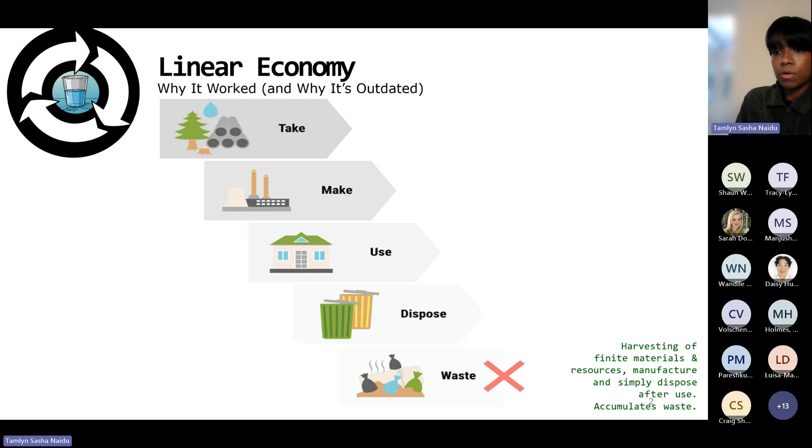The circular economy, on the other hand, challenges this linear model by trying to turn waste into a valuable resource. Interestingly, in the work that I'll show today, I found that these companies - the ones often seen as polluters, the villains of environmental narratives - are actually some of the biggest drivers of circularity.

So to start off, we will look at case study 1, and this is the slaughterhouse. This is the first site that I ever worked at, and it was a massive awakening regarding what wastewater and treating wastewater actually entails. The waste from an abattoir is, in my opinion, 10 times worse than a sewage treatment plant. Blood, fats, stomach content, and more, all washing down the drain.

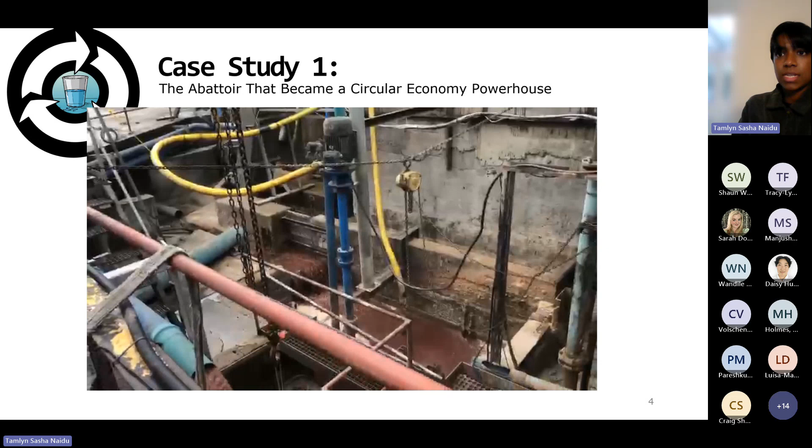This short video is from the site before any changes were implemented, and all the waste here that you see flowing out of that pipe, it all led into one outlet sump. So it was as linear as it gets in terms of process model. We'll start with what the situation looked like before circular economy principles were applied.

A slaughterhouse by its nature produces a significant amount of waste, organic waste, both in liquid and solid form. There are various points in the process where waste is generated. You have cattle holding areas where manure gets washed into the wastewater drain. During slaughtering, blood, which is actually an incredibly nutrient-rich material, is flushed away. The offal processing stage, where the stomach, bladder, and other organs are cleaned, contributes even more organic waste into the wastewater system. And of course, fat removal, which adds a significant amount of oils.

We call it FOGs - fats, oil, and greases - which complicates wastewater treatment processes quite a lot. So this was a textbook linear economy: consume, use, and discard. The wastewater generated from this process carries a high organic load, meaning high levels of COD and BOD - chemical and biological oxygen demand - and the FOGs, the oils and greases. All of these things contribute to severe environmental pollution. What's more, this slaughterhouse was facing pressure from regulators because their wastewater was overburdening municipal treatment facilities in the area, which were already struggling.

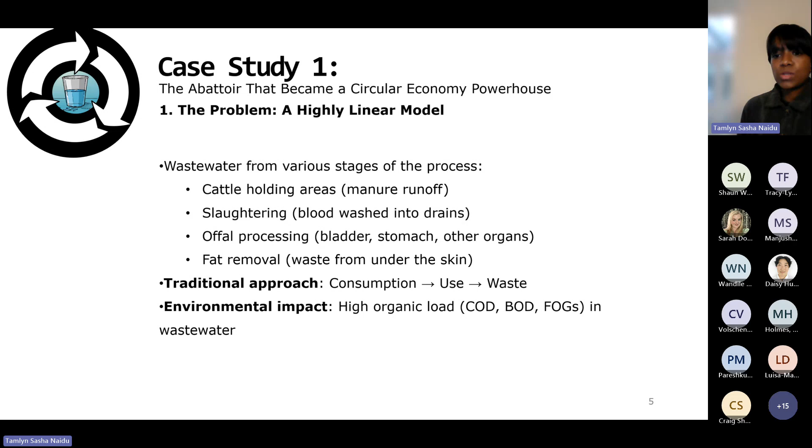So this is what we started at. This is where the shift from a linear to a circular approach began. They first had to rethink their process. And interestingly, I'm not sure if it's a good or bad thing, but this was done not necessarily out of a passion for sustainability, but because of economic and regulatory pressure.

A basic breakdown of what the changes implemented were: the first was blood recovery. One of the largest contributors to their wastewater load was blood. And this isn't just any type of waste, it's high in protein and incredibly valuable. They were already processing this, but due to a non-optimized separation process at the beginning, they were losing about 20% of their potential product to waste.

So instead of letting the excess blood wash away, we implemented a collection and separation system to recover as much blood as possible. And this wasn't a high-end technical solution at all. It was just essentially building two pipes instead of one and changing when they did a wash cycle. And they recovered this blood, which was then processed into blood meal, a key ingredient in animal feed and pet food, some premium pet food.

In fact, I remember when working on this project, it was during a period in South Africa where we had a shortage of Royal Canin pet food. And I just thought to myself, we're literally washing half of this valuable ingredient down the drain. They recovered it, and this change wasn't about environmental responsibility, it was about profitability. By maximizing their recovery, they turned what was once a pollutant into extra product with market value.

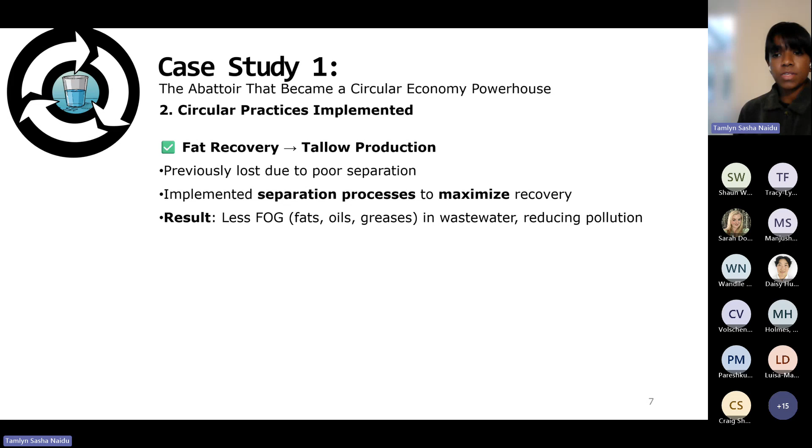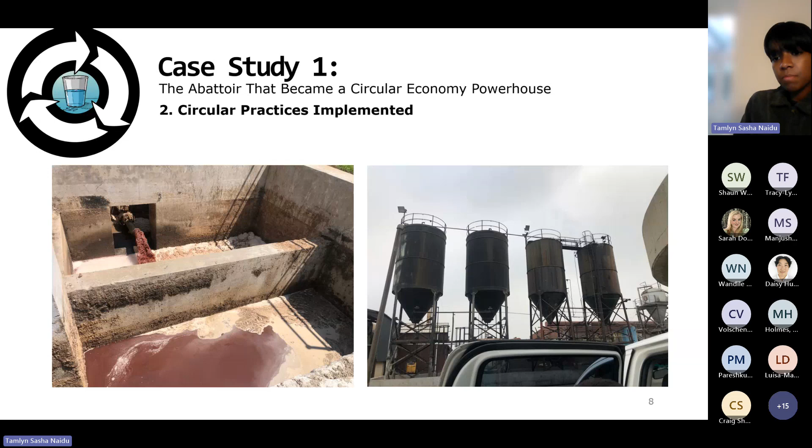Here you can see the fats at the surface. Once they were removed, they were put into these tallow tanks. Again, the motivation here was profit, but the unintended benefit was less pollution.

Lastly, it was biogas energy, which is something that we got from this process. This is more of a technical solution that did need some involved thinking and engineering design. The slaughterhouse's solid waste, which included undigested feed, organic matter, and fat residues, because there are still some smaller particles that will not get removed just from simple physical solid separation, this material is ideal for anaerobic digestion, a process that breaks down organic waste using microorganisms to produce biogas, generally methane.

But to make this work, solid liquid separation was key. We had to separate those solids from the liquid in order to use it as a substrate. So we installed a clarifier to remove the heavier solids. And there were a lot of solids here, so we did need two processes. We also did, for the finer solids, a dissolved air flotation unit. This basically uses tiny air bubbles dissolved in the liquid to lift any remaining solids to the surface for easy removal.

Unfortunately here we had to use a chemical input, so this introduced an open loop, because we now have an extra addition into this system, we have to add to the process. However, the setup did minimize chemical use because we had two physical processes instead of one, and it kept the costs down, which ensured very low amounts of chemicals were used and that the microbes in the digester weren't inhibited by excessive additives in the sludge.

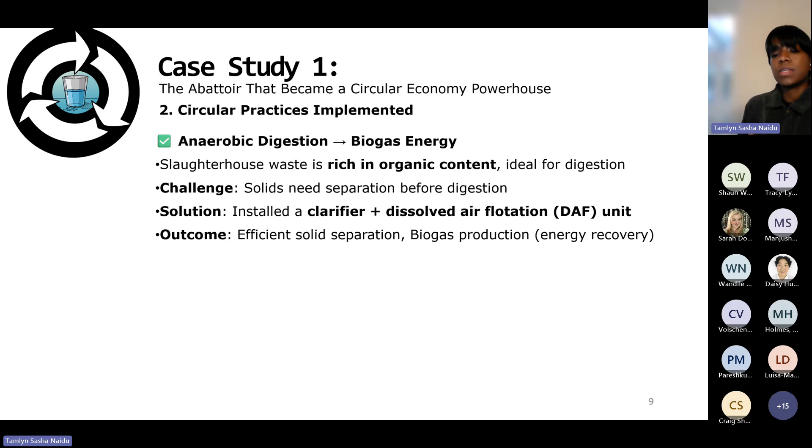They also used the finer sludge to treat some of the soil on their surrounding properties, but they had to use an additive to make it suitable for soil amendments. They were involved in a lot of experimental techniques at the time, and one they used was a steel slag powder. So again, that was another open loop - chemicals need to be added for water treatment, and another additive needed to be added to the sludge to use it for soil amendment.

However, the partially treated wastewater was now fit to be sent to municipal treatment plants. There were even discussions at this point about installing a reverse osmosis system to fully recycle water for internal reuse. I'm not sure, but I think the site is actually currently building this.

But again, the water reuse here wasn't just a sustainability measure - it was a business strategy. Given rising water tariffs and drought conditions in this area, securing a stable water supply would be a major competitive advantage. So again, not necessarily concerned with sustainability, but the main driver here was a business strategy.

However, this again was then an open loop. We now had a stream of water that was not fully reused or returned to the system. They did use some of it for washing and processing, for the processes where they could use grey water, but it was still an open loop. So a few open loops remained in the system now.

Number one, the treatment still required chemical inputs, specifically coagulants for solid separation - I'll link more info later, but this was an iron or aluminium-based coagulant, so an iron or aluminium sulfate or chloride. Number two, the additives they used for the soil along with the sludge - this was the steel slag. And now, of course, the outlets, which was partially cleaned water - some of that water was not returned directly to the plant.

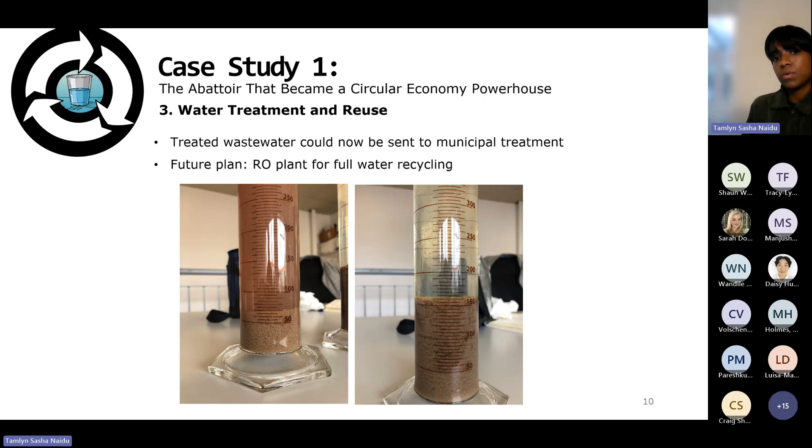But by this point, nearly everything that was once considered waste had been repurposed into a valuable product. There was tallow, now sold as a raw material for soap and biofuels; blood meal used in animal feed and pet food; COD-rich sludge fed into an anaerobic digester for biogas energy; and partially treated sludge applied to the fields around the area as a fertilizer supplement or soil amendment.

But these three open loops still remained: the chemical coagulants, the water treatment additives, and again, the water. The fact that not all wastewater was fully recovered for reuse meant the system wasn't fully circular, but it was still a significant step forward.

The drivers for circularity here, as I've mentioned a couple times now, primarily it was profit - recovering valuable byproducts meant higher revenue and lower losses. Secondarily, I would say it was regulatory pressure - they needed to comply with discharge limits to avoid fines.

And the last driver actually was sustainability, which is interesting. I'd argue later on that this is a good thing, because it means we can drive circularity not just by trying to leverage people's humanitarian side. By reducing waste and improving water efficiency, they were able to cut costs without costly technical interventions and create a more sustainable solution. So while their motivations were financial, the outcome was environmental.

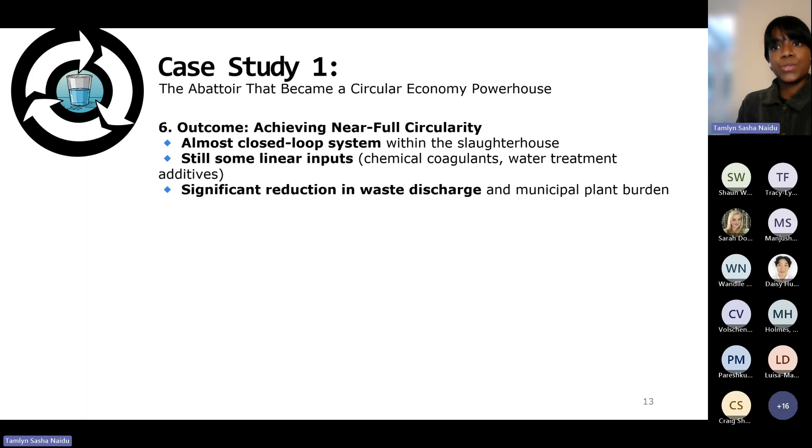They were able to achieve near full circularity at the end of this transformation. However, as I mentioned, there were still some gaps. But before we close those gaps, or rather as a way to close those gaps, I'll move on to case study 2, which was on the other end of the spectrum.

Shifting our focus from waste treatment at an abattoir, where we're trying to process or provide meat, to water scarcity in fast food operations. This was also in South Africa, and of course SA is not a stranger to droughts. During one particularly severe drought period, many businesses found themselves in crisis mode.

This is arguable, but the food chain we were assisting here argued that very few industries were hit as directly as fast food chains. Why? Because they have strict regulatory requirements.

So if a store doesn't have running water, it must close until water is restored. No water means no hygiene, no safe food preparation, and no way to actually operate safely. And for a large fast food franchise with multiple stores across the country, this was a major financial risk. Some stores remained closed for days, and this led to significant revenue losses.

The brand's governing body, the corporate board that set the operational standards for all of the stores, recognized that this was not just a localized issue, but a network-wide crisis, and they needed a long-term water resilience plan. So before bringing us in to find a more sustainable solution, they did try some of their own solutions.

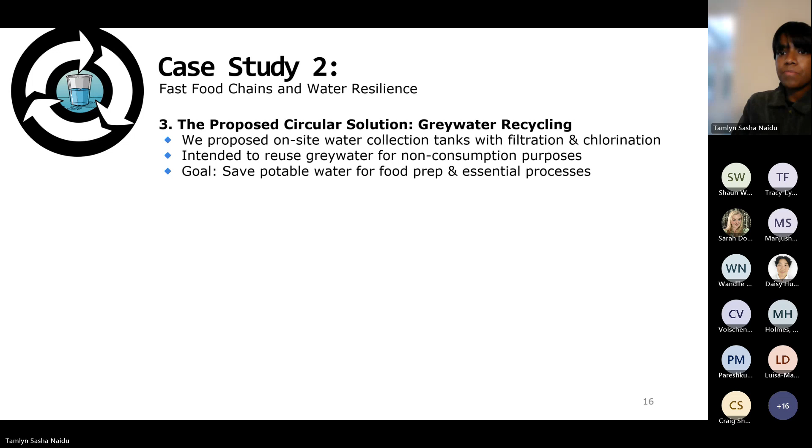This is when we started looking beyond the franchise and exploring the potential of inter-industry water reuse, between different industries. Instead of trucking in raw water from a distant farm, which we didn't know the quality of, and it was constantly changing, we looked at existing industrial wastewater streams that were already being treated, that we knew the constituents of, that could be reused safely, because we would know what is in it and what it is being used for. One of the proposed sources was the abattoir's treated wastewater.

This is a perfect example of circularity in action. What was once considered wastewater from one industry could now become a resource for another. Instead of discharging its treated effluent into the environment, the abattoir's water could be repurposed for non-potable use at other outlets. Now, they didn't use this option — they instead actually used treated water from a car manufacturer, which was much closer. But the principle still stands: something considered waste was now being used as a resource in another industry.

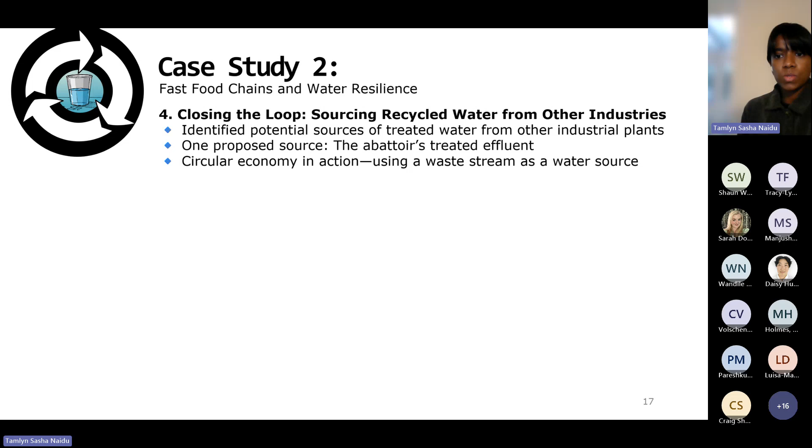In our last case study, we'll take a step back from both food production and water shortages, from the food industry in general, and shift our focus to heavy industry, specifically steel mills and mining operations. This was primarily my PhD research.

Steel mills generate slag, a byproduct rich in oxides. While this slag has valuable applications, generally being used as a construction aggregate or as a soil amendment — this is also one of the products used at the abattoir — it has one major issue when being used in construction, and that is structural instability. There are a lot of free oxides in the slag that react with water and air when in contact, forming hydroxides. A hydroxide is bigger than just a simple oxide, so it causes swelling, causing volume instability, which is not something you want in construction materials.

The traditional solution to this is to treat the slag with acid, which stabilizes it by removing these free oxides. But this brings us back to the linear economy model, because acid is now an external input into the system, requiring transport and additional costs to acquire and use it.

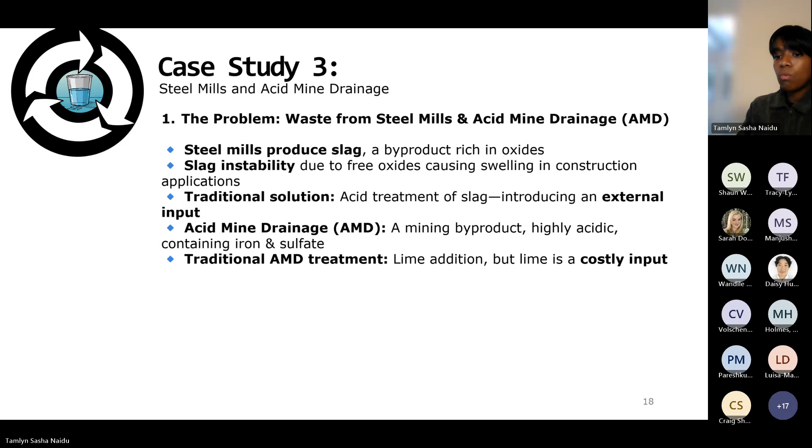Instead of viewing the two as separate problems, we asked the question: can one waste stream be used to neutralize the other? And the answer is yes. Slag is alkaline because it is essentially lime that has absorbed some impurities from iron ore, and it reacts with acid. And AMD is acidic.

It requires neutralization. So by treating AMD with the slag, we effectively neutralize both waste streams at the same time, treating the AMD to a better quality, removing a metal-rich sludge, and removing the volume instability from slag, which had free oxides present before.

And the result that we get from this is a cleaner water stream, a stabilized slag product that can now be safely used in construction, and a reduction in the need for external chemical inputs, making the process more cost-effective and circular. And this was a major breakthrough, but it still left us with one more challenge.

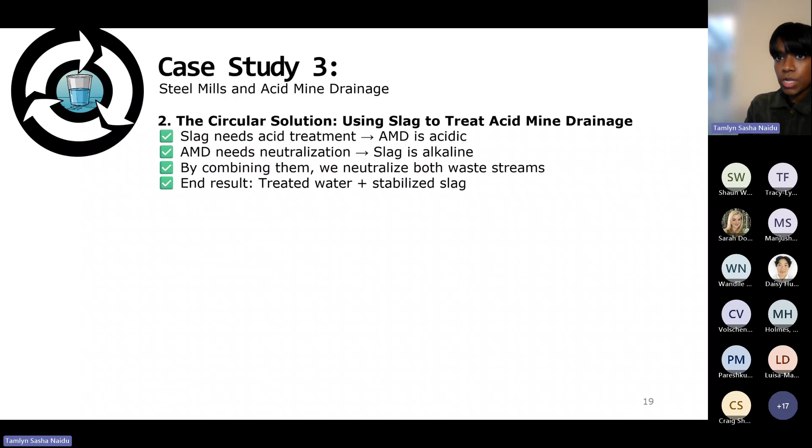While the solution successfully treated both slag and AMD, it left us with one final waste product, another open loop. And this was a sludge rich in iron and sulfate. While the sludge is less hazardous than untreated AMD because we can control it better, it's still a waste product, which means the loop isn't fully closed yet.

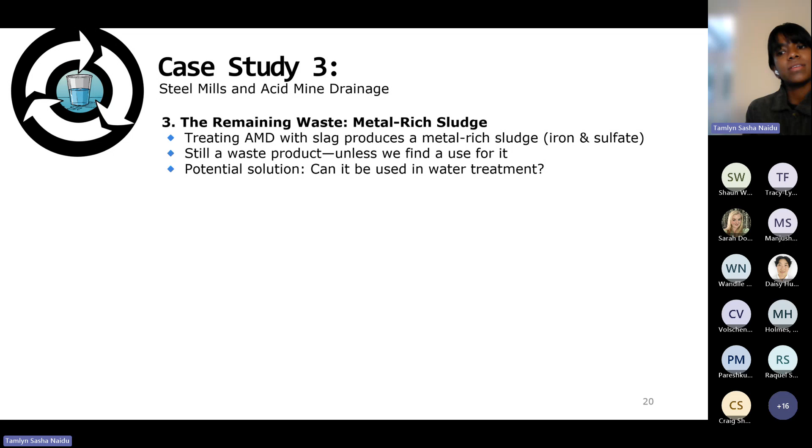So we started looking at other industries where iron-rich materials can be used, and that's when we saw an interesting possibility. One of the major applications of iron-based materials is in water treatment, specifically as a coagulant to treat water across industries. And it's the same in abattoir treatment.

As I mentioned, they do use iron-based coagulants, and that is what they were using at the site to optimize their liquid-solid separation. Coagulants help remove organic pollutants, like the organic materials, COD and BOD that we had in the abattoir waste, by destabilizing the forces in the water and making them easier to separate, flocculate, and clump into a heavier solid that will drop out.

So we conducted tests using this iron-rich sludge. We did have to do some prior treatment to it before using it, but we used it to check if we could drop this organic matter out.

And the questions we asked were: could it be used to separate organic matter? Would it be as effective as conventional coagulants like iron chloride or aluminium sulfate that we were getting from other companies we were buying from? And the results were highly successful.

So instead of being a waste product, the iron sludge from AMD treatment was now repurposed as a coagulant. And this brings us full circle to cleaner water and closes all of the loops in our 4 industries and 3 case studies here.

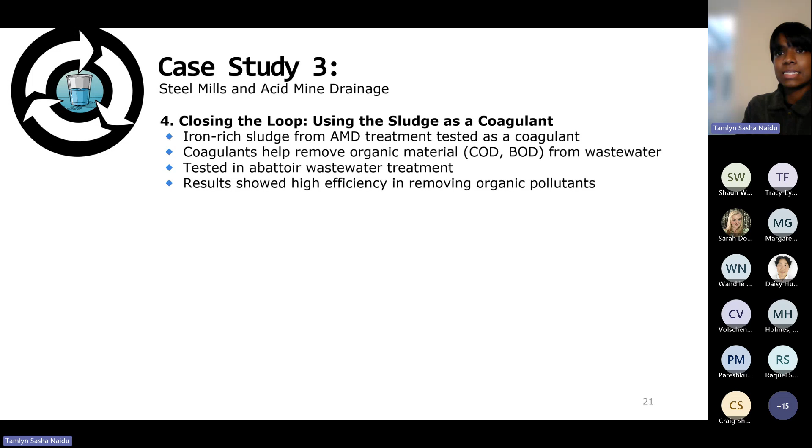So over the course of these case studies, we've seen how circularity isn't just a theoretical concept that we would like to achieve. It's already being achieved across industries. It's real, it's tangible, and it's a business strategy that works.

From the abattoir transforming its waste into valuable byproducts, to the fast food franchise tackling water shortages through industrial partnerships, and then to the steel mills and mining waste combining to create a mutually beneficial solution, a few things remain clear.

Circularity doesn't happen in isolation. It thrives when it aligns with economic incentives. It works best when industries collaborate rather than operate in silos. And even when loops remain open, as we've seen in these case studies, they highlight areas for further innovation and opportunity—an opportunity to find a use for that remaining loop.

So essentially, we need to stop looking at waste as an end product and start seeing it as a resource in transition, whether it is directly from the process or from the treatment process that you are proposing. Waste isn't waste until we actually waste it.

And most importantly, I think in these examples something to note is that circularity isn't automatic. It has to be designed and implemented. Processes need to be changed, and we need to do multiple adaptations over time to our real world constraints.